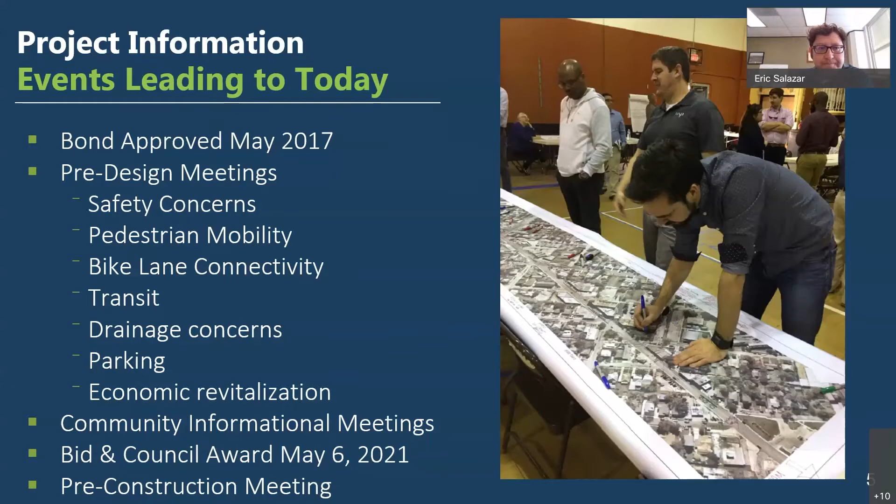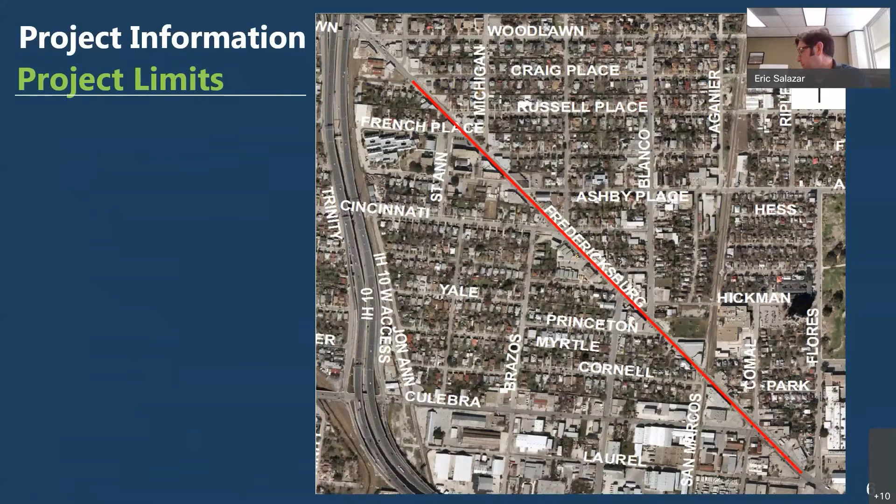Project limits are from North Flores to West Craig; that's where we plan on making our improvements. Our existing conditions: currently we have a 4-lane facility, 11-foot wide lanes, a high pedestrian traffic area. It's a high VIA ridership corridor as well, and we currently have no bike facilities.

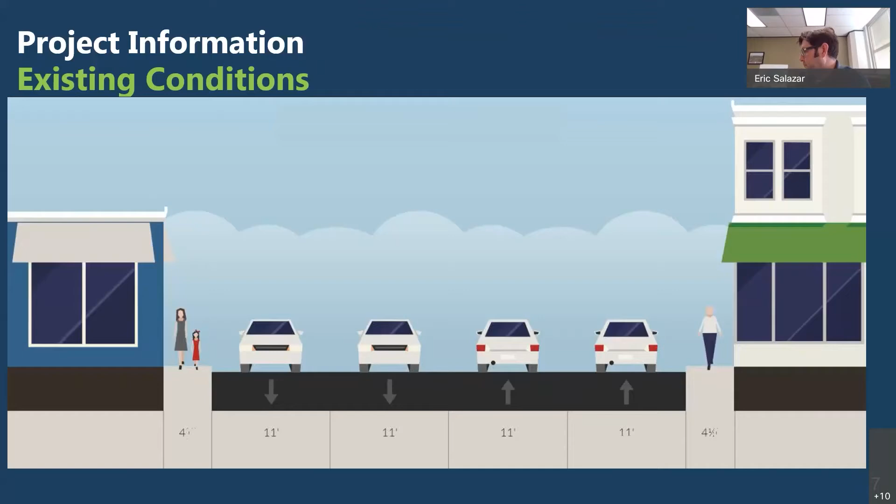These are a couple of photos of the existing conditions at Fredericksburg. We took it from Hickman looking west, and then again looking east. So these are the existing conditions we see there at Fredericksburg.

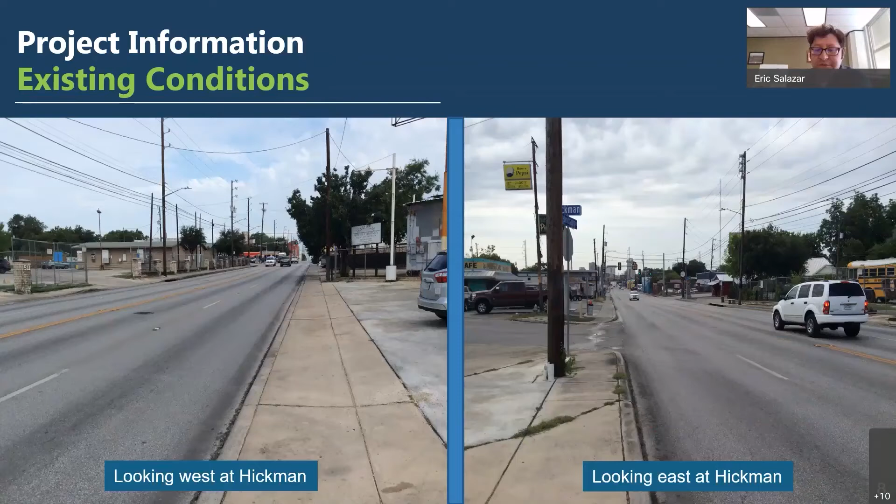We consider this project in two parts: one south of Cincinnati, and the other north of Cincinnati. So essentially from North Flores to Cincinnati, we wanted to focus on bike facilities. We took this lane transformation and reduced it from 4 lanes into 2 through lanes with 1 turning lane, which will accommodate a 5-foot bike lane. That's the first section you'll see.

This is again from Culebra to Cincinnati. Then the north section from Cincinnati to West Craig — here we wanted to focus on pedestrian amenities, wider sidewalks, and parking. We understood there are large commercial properties in the area, so we wanted to focus on providing public parking in that section, from Cincinnati to West Craig.

The improvements include curbs, sidewalks, driveway approaches, base repair and pavement resurfacing, traffic signal upgrades at Culebra, Blanco, Colorado, Cincinnati, and a new signal at French, along with pedestrian crossings, lane reconfiguration, bike lanes, on-street parking, bus pads, pullouts, and shelters, additional drainage capture, and utility upgrades.

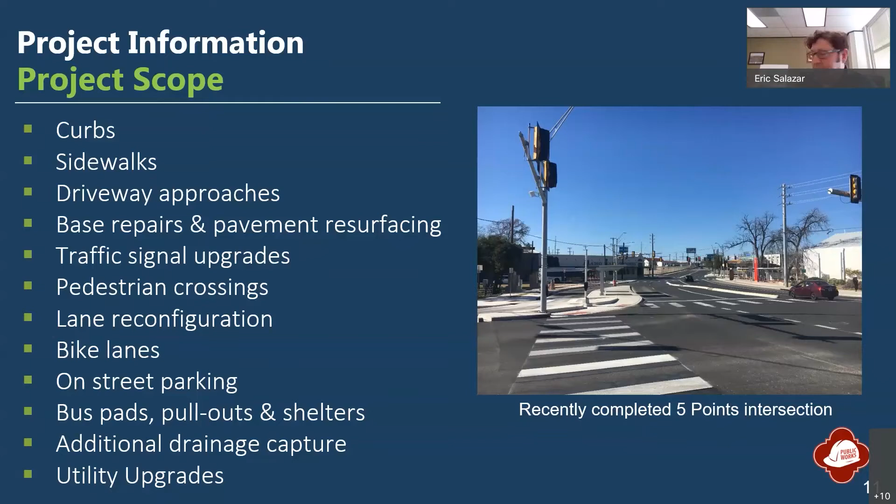We're going to go and view the schematic and project improvements starting at North Flores to Culebra Road. Here, this is where we transition. As you're aware, we've completed the bond project for the 5 Points intersection. We got bike lanes and bus facilities at that intersection.

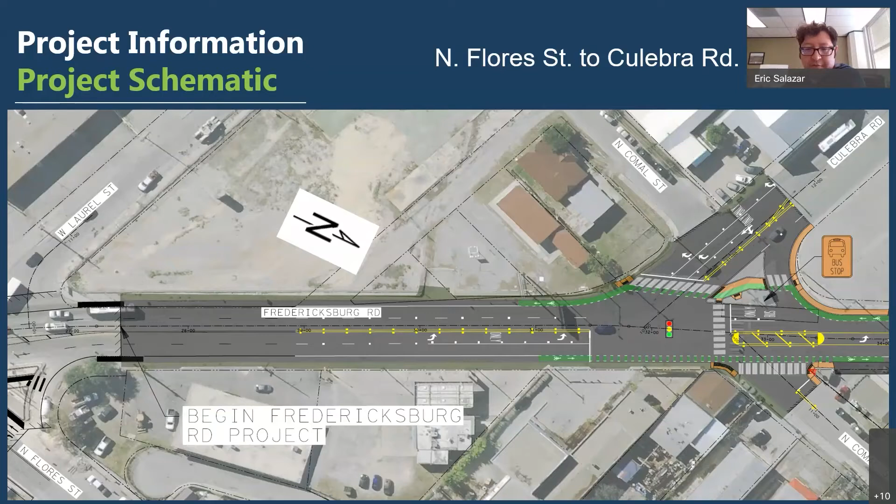So we wanted to incorporate that and continue that transition into Culebra. In this section, we'll have a mill and overlay. Of course, the entire project's actually a mill and overlay, but in order for us to make those transitions with pavement markings, we'll start the mill and overlay there where we ended off at 5 Points. What you see in green are the proposed bike lanes. What's in orange are the proposed sidewalks. And then there's some portions of red, typically corner clips or edges that you'll see as proposed right-of-way. So this is a section where we transition from 4 lanes into two lanes and a turning lane.

The section from Culebra Road to UPR Railroad, we maintain these. This is where you really see the typical section with the 2 through lanes, 1 in each direction, and the turning lane. The bus stop there at Culebra, top of your screen, will remain there at that same location.

Continuing on from UP Railroad to Princeton Street, the existing bus stop at Sandoval is being consolidated with the existing bus stop at UPR. So here at Sandoval, this location, bottom of the screen, this will no longer exist. It's being consolidated with this bus stop at Union Pacific Railroad. Here, we can start seeing the medians, the concrete medians at this intersection, Sandoval, on both sides of the intersection.

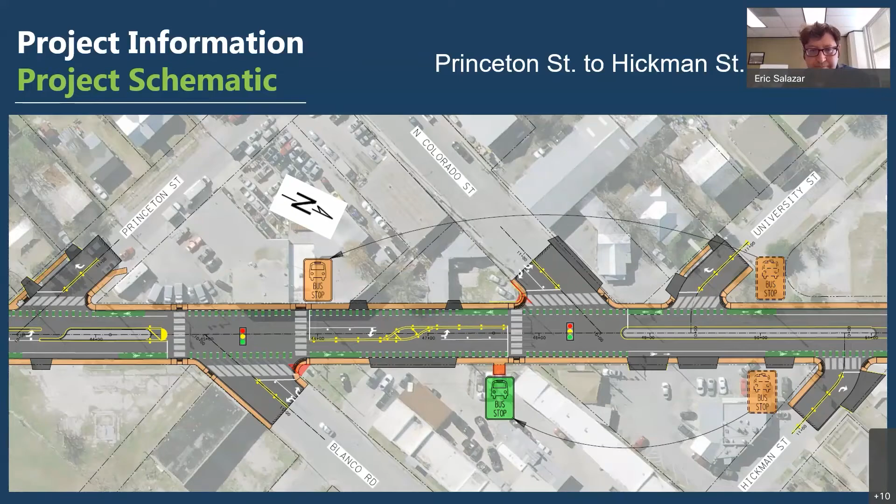And continuing with the bike lanes, 5-foot bike lanes. Hickman and Cincinnati. We have an upgrade there at Cincinnati for the traffic signals. This is where we terminate the bike lanes and continue them down Cincinnati, and move forward with the larger sidewalks and on-street parking past Cincinnati.

Existing bus stop at Cincinnati is being relocated 150 feet north of Cincinnati. This is top of screen. Existing bus stop at Cincinnati and Grant will remain. Construct bus pullout. This is the bottom of the screen at this location.

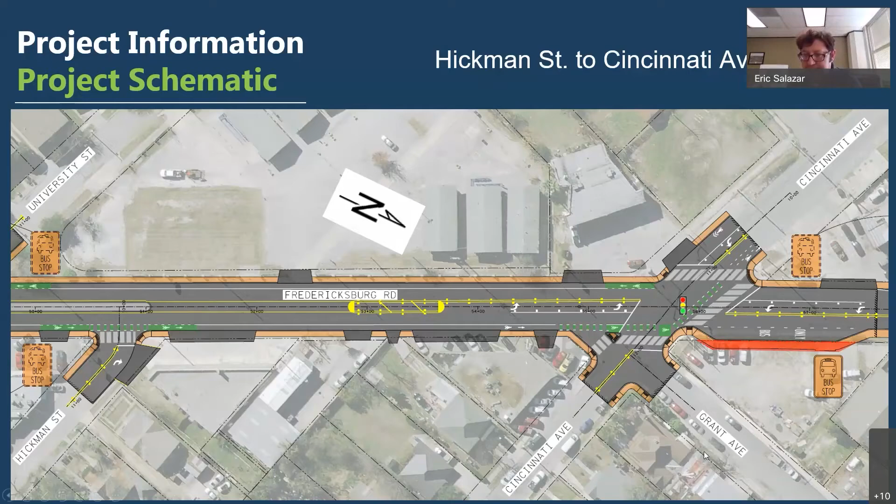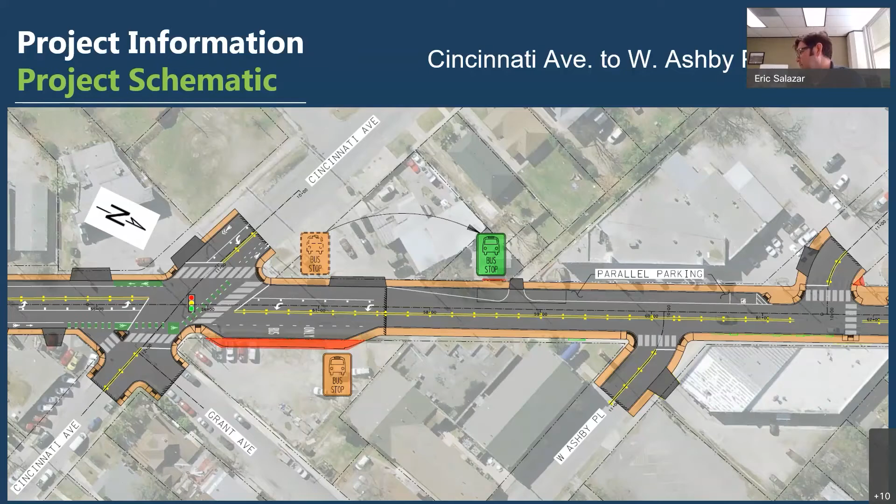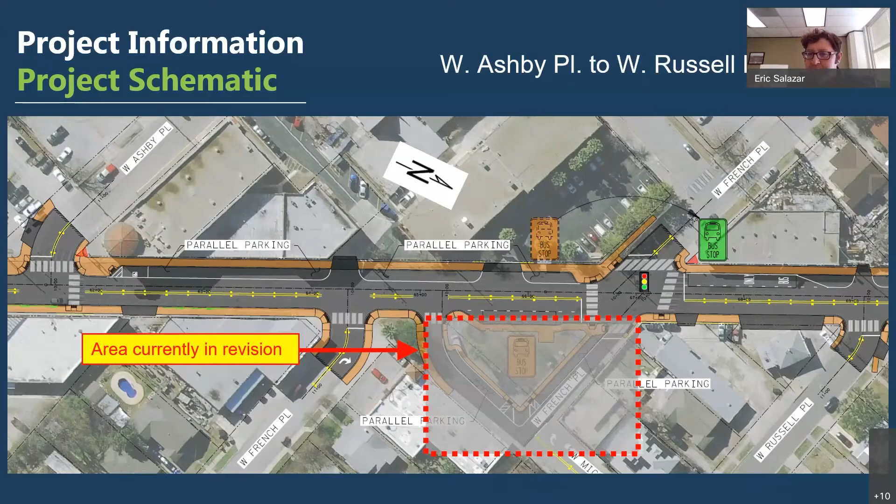Our work schedule. We have 3 phases of the project. First, we're going to start on the northbound lanes. We'll push all the traffic north and southbound 2 lanes to the southbound side, maintain that traffic while we work on the northbound lanes. We'll adjust the sidewalks, do some drainage improvements, utility work, concrete work, flat work, and road work, of course.

And then we'll move traffic on to the new improvements, and then work on the southbound side of the project, southbound lanes. Do the same thing, make utility adjustments, drainage, concrete work, and then road work. Once that's complete, we'll work on the medians, the concrete medians in the middle, all the while keeping traffic both ways, inbound and outbound.

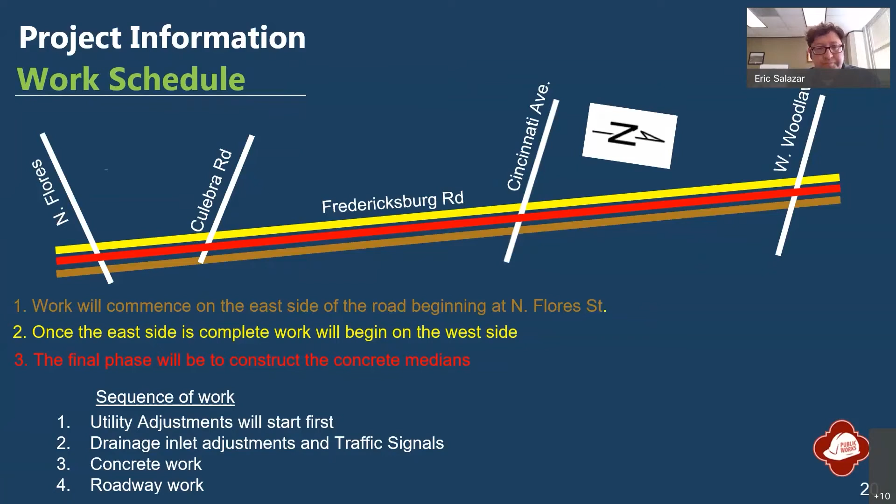Our construction start, we have an NTP, a notice to proceed on September 7th, early this next month. We'll be completing construction May 2023.

I'm going to turn it over to Abigail to discuss the VIA amenities and what to expect with the detours.

Thanks, Eric. Hi, good evening. My name is Abigail Kinnison. I'm the Director of Capital Projects at VIA Metropolitan Transit, and we are happy to partner with the city on this project.

So we are proposing to detour off of this roadway during construction for a couple of reasons, the main one being safety. As Eric mentioned, they're going to work on one side of the road and then the other, but we wouldn't be able to open doors or let passengers in or out depending on which side of the road was being worked on. So we felt like it was best just to remove from the area.

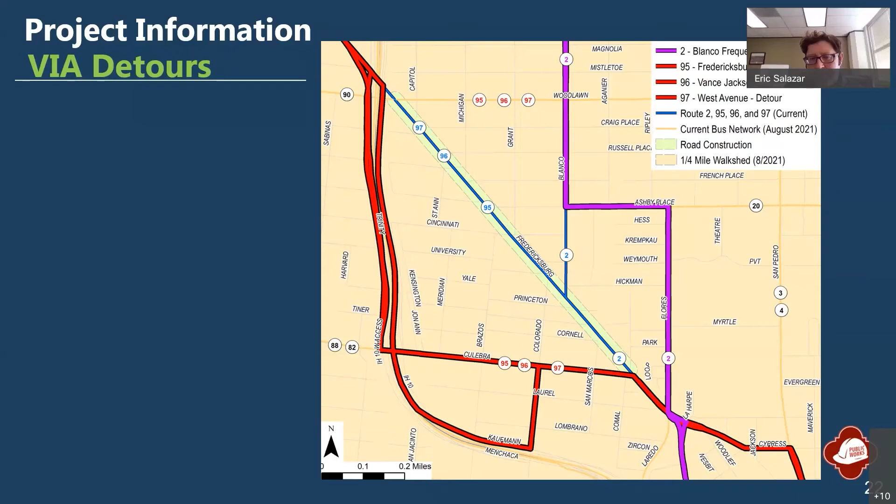The question was, will we only be allowed a right turn from West Craig onto Fredericksburg Road? Looking at the east side there, that is correct. It's only a right turn, right in and right out, both on northbound and southbound.

I agree with that. Will any trees be planted? I don't think there's anything planned in the medians, correct? It would be a way to sustain them. We are working with the Beacon Hill Neighborhood Association to enhance the green space, the Liz Davies green space, and that would be the location where those things would be considered.

Thank you, Eric. The next question: rerouting VIA traffic takes a toll on the smaller roads. Will there be funding for repairs on all of those detour roads? From the public works perspective, if the roads do get torn up from heavier traffic, we would be repairing them as those repairs are necessary. On potholes, we've got a 2-day turnaround. You call 311, and if it becomes something more major, I'm sure we can address the issue down the road.

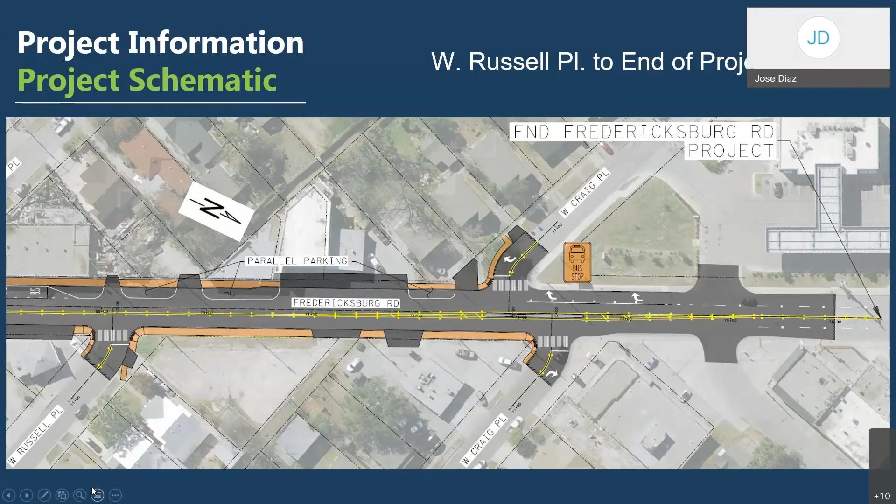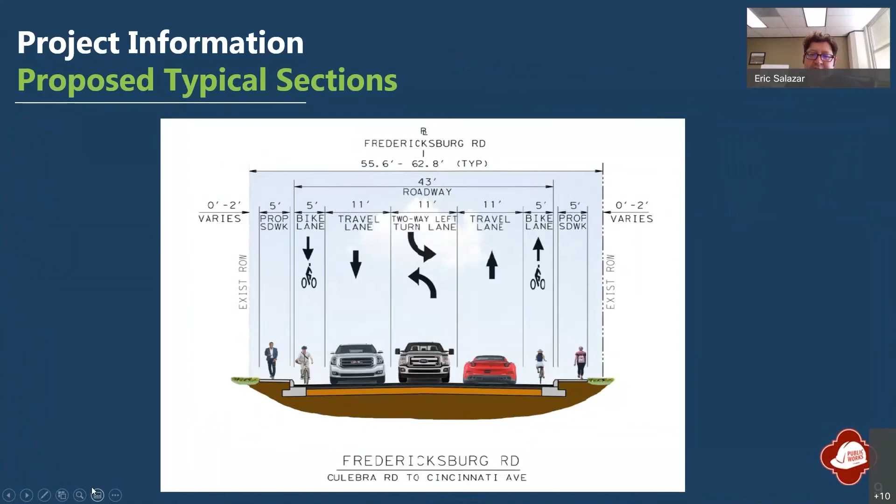I believe there are sections that have the left turn lane, what we call the 2-way left turn lane. So in this section, from Culebra to Cincinnati, that's where we have the turning lane. So that section you should see the turning lane. And then from Cincinnati to Craig, there will not be the turning lane. Okay, thank you for that.

There's a specific question about a piece of property at 140 Fred Road. Will there be any realignment of the sidewalk and the entry apron at 140 Fred Road on the east side of the road at Culebra? Can anyone talk to that right now, or is that something to handle offline?

I think we can handle that offline. As long as we have the address, we can definitely get with that particular property and address that directly. Okay, let me type that up real quick. Please email Richard.

Let's see if we have any other questions. No more questions in the Q&A at this time. It doesn't appear so - anybody else have any more questions about the project? If not, I can try to see what we can do for our telephone audience.

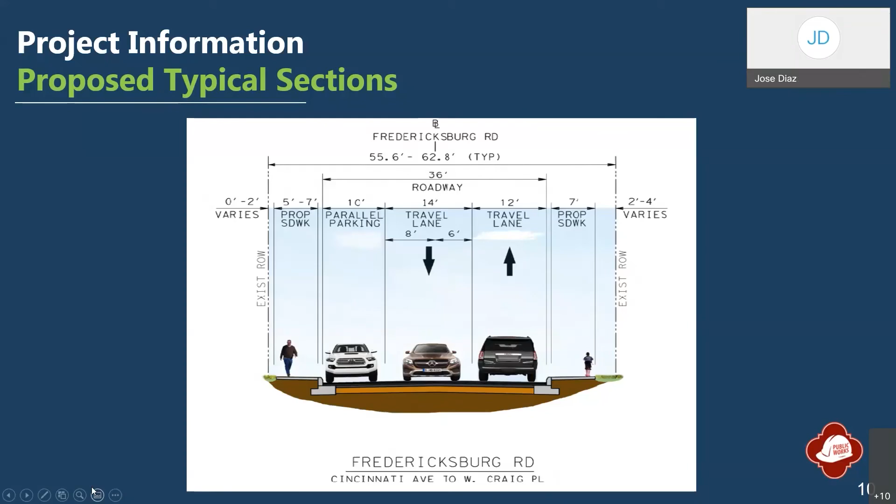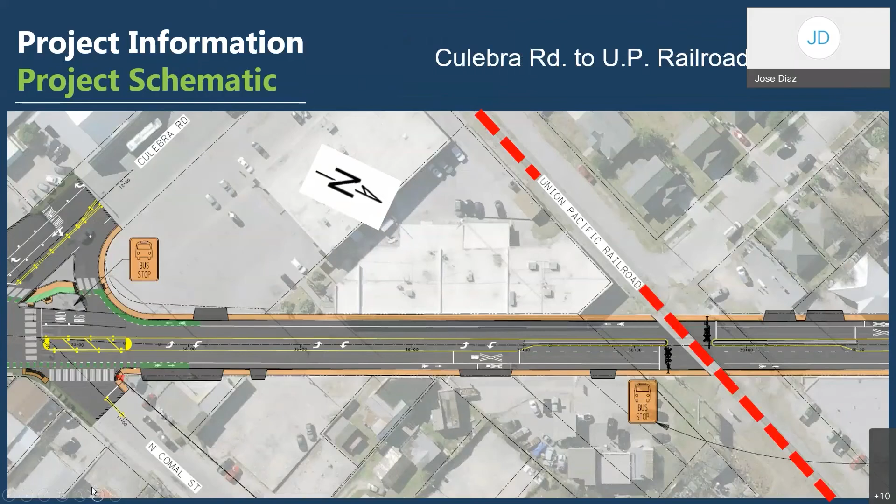For example, by the railroad tracks, I believe the median there is roughly 4 or 5 feet, depending on where we measure. If it's from face of curb to face of curb, it would be a 4-foot median wide. And then as we travel along and get closer to Sandoval and Princeton, there is a kind of varying median that creates the left turn lane.

That one itself is 10 feet wide at the widest, so you can think of it as occupying what used to be the existing left turn lane. When you look at the wide ones, you could estimate somewhere around 10 feet, and the thinner ones would be about 4 feet.

We don't have to do that right now, but I'd love to have a conversation about putting trees in those medians. If it were up to me, I'd say we never build a median in this city again that doesn't have trees in it, unless there's some huge safety issue I'm unaware of.

My last question is, if people put their email in the chat, will you all be able to send them a copy of this presentation? I can send it to whoever requests it for sure. If they send it to Richard Casiano and ask for it, we can certainly send the presentation to them. Sounds great, okay, thank you.

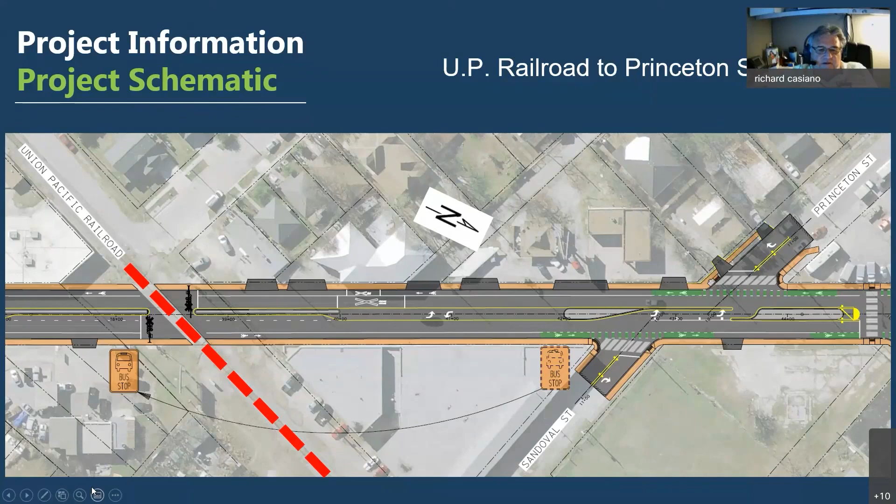Well, no, thank you very much, and thank you, folks. Let me see if I'm missing anything. If you put my contact information up on that slide, just for everyone to know that after this meeting, if you have any questions, concerns, or wants of any kind for this project until we're finished, my number's there, my email's there. Call me anytime, and I'll be happy to help you out with any problems you have out there. That's what I do, thank you.

Thanks, Richard, for that. We had a final question. They want to know if the plans are finalized, and I'll assume yes, they are. This is just giving you an idea of where we're coming from. Are we still taking input on the plans, or is this basically what we're moving forward with? Yeah, Joe, the project's already been bid. We may make some tweaks during construction, but basically the project has been fully designed. It's been bid out to a contractor, and we have a contract to begin the work you see here in the presentation tonight. So unless we find some other issue we need to change during construction, this is the plan we're moving forward with.

I did want to close by saying thank you all for supporting the bond program. We're in the fifth year of the 2017 bond program, and we're already working on getting prepared for the 2022 bond program that will go to the voters in May of 2022. At one of the recent city council meetings, the overall bond was projected to be about 1.2 billion this round, over 350 million more than the last bond we did, 850 million. Great support — we appreciate every vote we get for the bond and the support from the community. That's how we're able to bring these great projects to different parts of San Antonio.